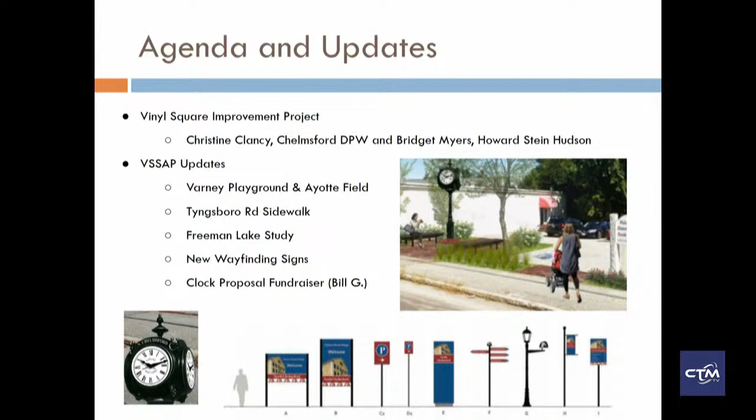There'll be a chance to potentially buy a brick and some other things. We have some people ramping up the efforts there, so there'll be more to come, but that'll be a nice enhancement. There'll be a temporary location, and then when the project's all well and done and finished, we're looking to potentially move it. I have another slide showing that, but it will be a temporary position right near the municipal parking lot.

Couple of things I just want to address here. This past year, there's been a few things that have gone on, and this committee does a fantastic job, and the team I announced earlier, whether it be the town support or the group here, it's just been very busy like anybody else. But I just want to share some opportunities to get people more involved.

At Varney Neighborhood Playground, if there's a potential phase two, if anybody wants to come up with ideas or just designate the open area to have more activities, this is a way to go over some bullets of other things to get more involved. We have the beach, the courts, Ayotte Field, there's some nice real estate in the park area. So if any parents out there want to create new events or programs, this committee is a good vehicle to get involved with to help drive that.

This past weekend we had a successful holiday tree lighting at Vinal Square in the Common. It went over really well, and I'll get into my thank yous. If you weren't there, you missed a good time, and Santa came and really kicked it off nice by lighting the tree. The North Town Hall Committee, I want to give a shout out to the folks there. They also do a great job with the Halloween parade and party. If anybody would like to get more involved with that too, we'd love to hear from you.

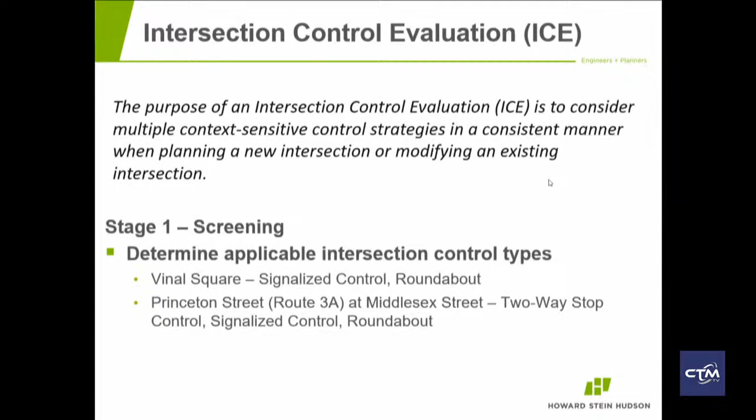I'm sure everyone is wondering, how can you fit a roundabout in there? Operationally, it seems like it would be a great idea because you have all these streets coming into this one area. So in theory, it actually would have been nice, but it doesn't fit. We have a very strange geometry. That's kind of the best thing we came up with as far as functional drawings. What you're seeing on the right side of the screen, it was like a peanut-shaped roundabout, but we were impacting buildings, so that kills it.

But we have to go through these functional sketches of different intersection types, and then they go through their forms. You get to this cost-benefit analysis of, is this the most appropriate type of intersection for this project?

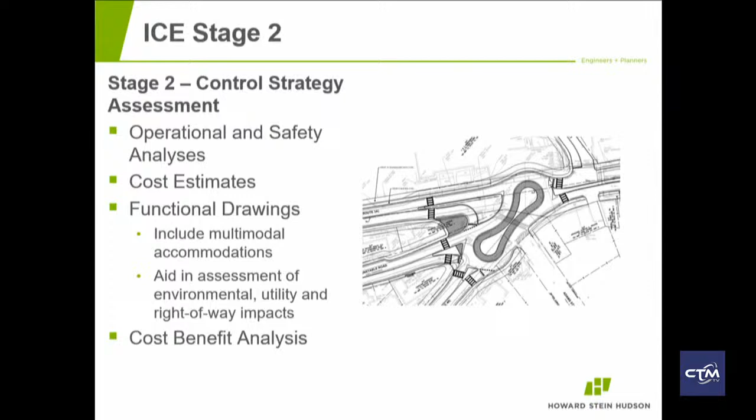The results of that for what we're calling Vinal Square, the bigger intersection with Groton Road, Dunstable, Adams, and 3A, is signalized as it is today. The Middlesex Street intersection is remaining a two-way stop control. That was a close one - signalized and two-way stop control were neck and neck, but it came down to cost. The safety improvements there didn't quite outweigh the cost of the signal, because the geometric improvements will provide some of that safety. Not to say that's not something that could be added down the line, but that's where we're at right now.

So there was a lot of back and forth reviews with MassDOT, because with any new policy the process is kind of a learning curve on both ends - growing pains and such. That took quite a while, wasn't expected in our design process, but we got through it and we're here.

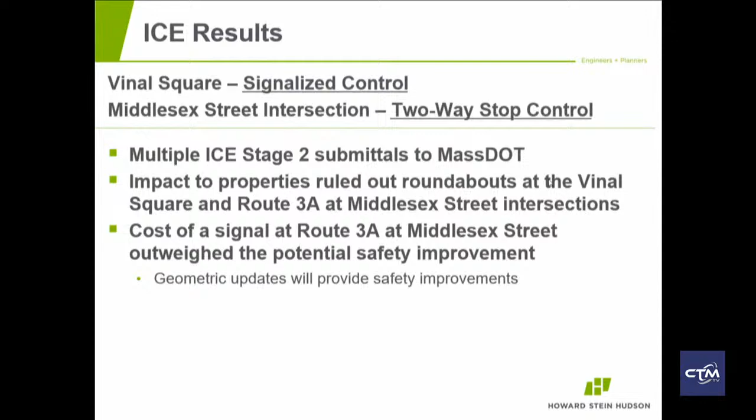So these are some of the crash data takeaways we saw. That larger Vinal Square intersection is actually listed on MassDOT's high crash data - in 2019 to 2021 it was a high crash cluster. Some of the main ones we saw were right-angle crashes, where you have that movement of people trying to take a left onto Groton and the southbound through traffic. That was a big one we saw.

So some potential ways to help with that are providing a protected left turn phase on 3A northbound when taking a left onto Groton, instead of the protected-permitted phase. So you end up with a green arrow protected instead of also dealing with southbound traffic. And then just some general intersection improvements, some tightening of turning movements and aligning lanes better.

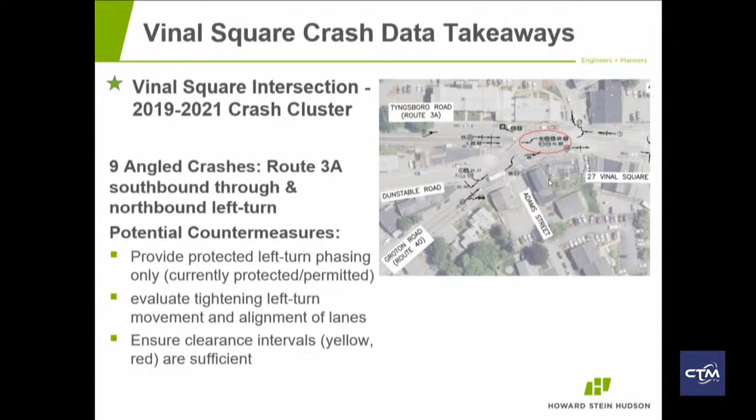At the Dunstable Road intersection, that came up a lot because it's very difficult to get out of Dunstable Road since it's stop controlled. Some of the feedback in that planning study was that people are blocking Groton Road westbound because people are trying to get out of Dunstable Road to get into the square. So we knew one of the main goals was to get Dunstable Road signalized so they would have their own phase and time to get in and out of that side street.

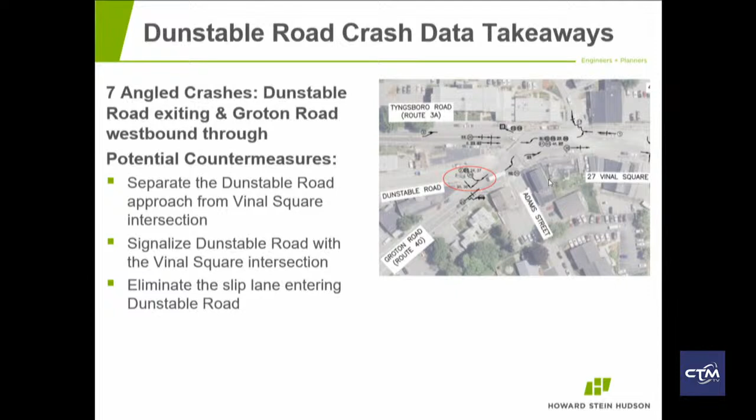Middlesex Street had a lot of rear-end crashes with that channelized right turn lane, because people take that right pretty quickly - you barely have to stop. Some of the feedback was that a lot of people don't stop. So the countermeasure there is to remove that slip lane and make it more of a formalized right turn lane, bringing it closer to a 90-degree angle with Route 3A. That also opens up that corner for more streetscape improvements, like the clock we saw in the earlier slides.

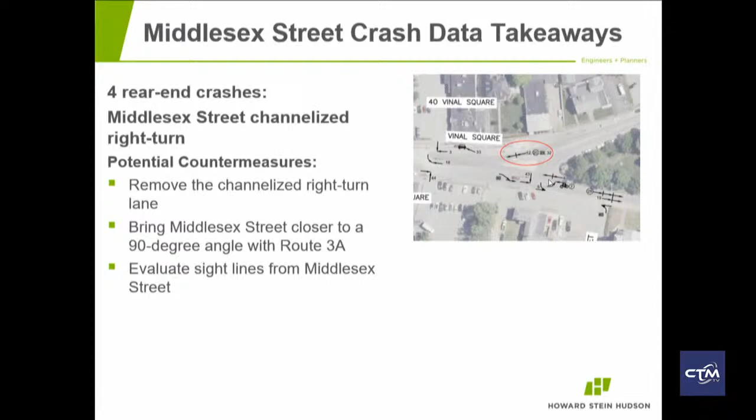Now I want to cover some of the things we have to consider when taking projects through MassDOT review. MassDOT will be funding the construction of this project, and Route 3A is a state road, so they will be reviewing it and we have to abide by their design guidelines and policies. One of those is the Healthy Transportation Policy, implemented in 2013. In simplest terms, it means we have to consider pedestrian and bicycle improvements on all their projects on all roads.

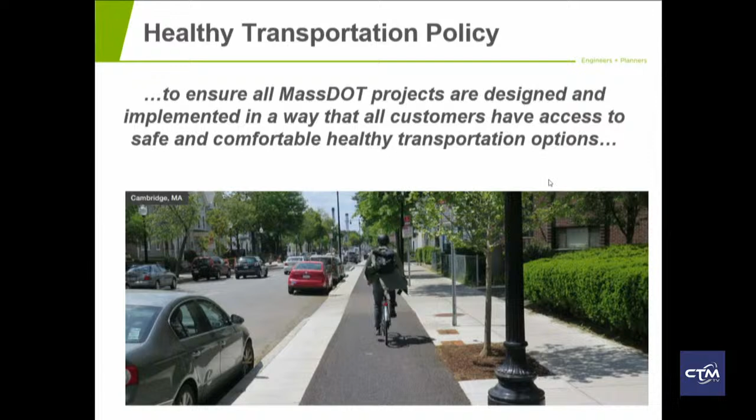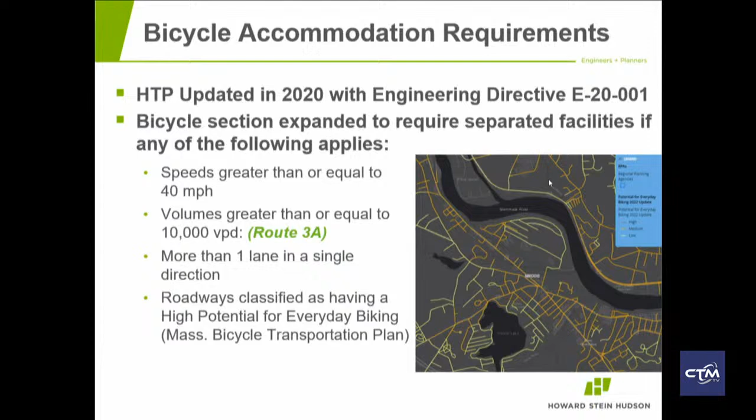In 2020, they provided an update to this policy with an engineering directive, mostly focused on bike accommodations and what type to provide based on speeds and volumes of roadways. The one we're ticking off here is on 3A, where we've got volumes greater than 10,000 vehicles per day. In those situations, they would look for a separated facility - more than just a painted bike lane on the road. They want vertical or horizontal separation, whether that's a buffered bike lane, a separated bike lane, or a shared use path.

The reason for that is pretty well stated with this graphic. The people they're trying to focus on with their policy are this 60% who are interested but concerned - somewhat interested, maybe in biking, but they don't because there's not a safe or comfortable place to do it. Not so much that 1%.

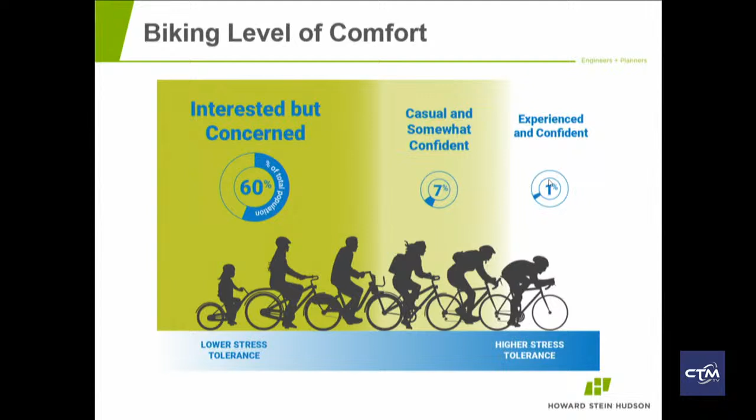Those are the people you're probably already seeing out there now, and there's probably not many of them. But those are the people already riding out on the road - they'll ride anywhere, anytime. What we're designing for more is the left side, trying to get more people who are potentially interested out on bikes.

So the general overall improvements included in this project are geometric improvements at intersections, new traffic signals at the Vinal Square and Dunstable Road intersections, ADA compliant sidewalks and ramps, safe bike accommodations, reconstructed pavement, new signage and striping, utility relocations as needed. There are some utility poles that will have to be shifted around, and some additional crosswalks.

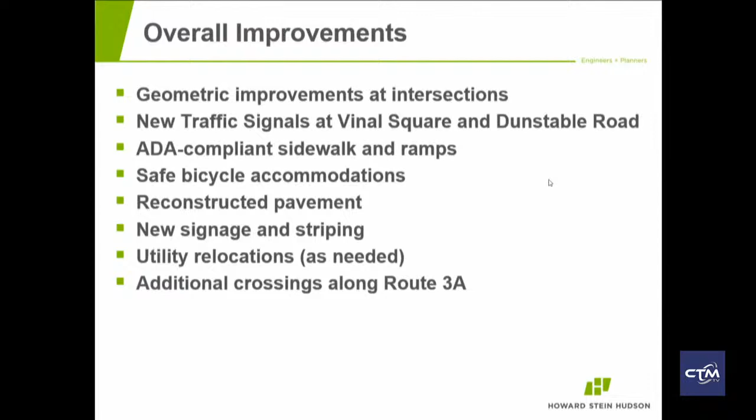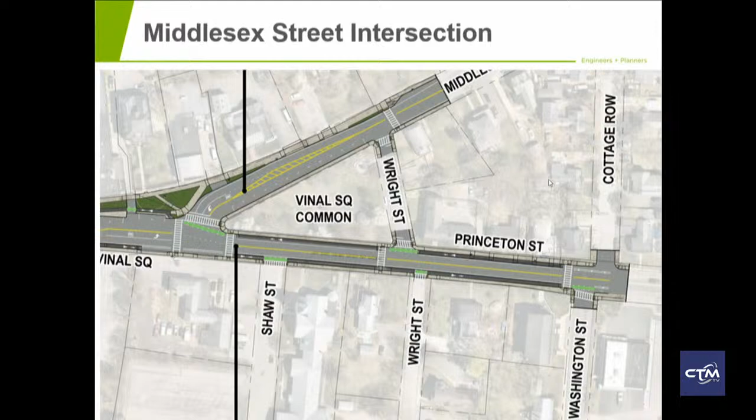At Middlesex Street, like I mentioned before, we're removing that slip lane. That lane coming down Middlesex Street towards 3A is primarily a right turn lane - that's the big movement. There aren't many vehicles making the left turn movement, at least from what we saw in the traffic counts. Removing it will slow vehicles taking that right turn, and add crossings, added ramps, reconstructed sidewalks, and bike and ped accommodations, opening up that corner for potential streetscape improvements and landscaping.

Now we'll go through a cross-section view. This is for Route 3A at Tyngsboro Road, north of the signal, looking south. On the right side would be the hardware store.

Going from left to right we have a 5-foot sidewalk, a 2-foot buffer, and a separated bike lane up at sidewalk level. So you have the sidewalk, then a buffer between the bike lane and sidewalk, and another buffer between the bike lane and the parking lane - you want that buffer so you don't have bikes getting hit by vehicles opening their doors. We've got one travel lane in each direction, and on the right side is an at-grade buffered bike lane, then a sidewalk which varies in width.

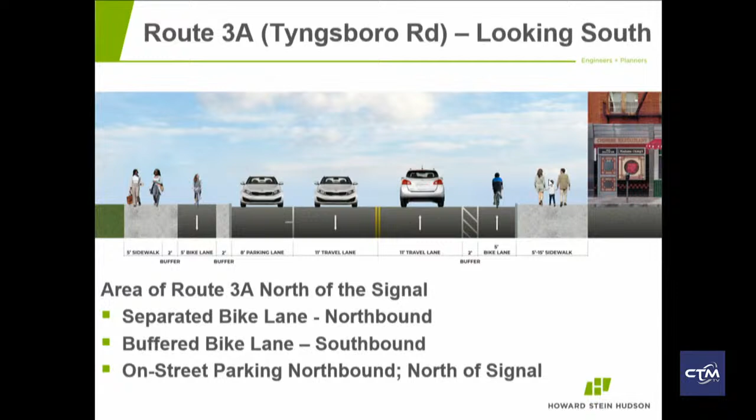Route 3A Vinal Square, this is the area between Groton Road and Middlesex. Here we have separated bike lanes on both sides of the road, as well as parking lanes and travel lanes, and a left turn lane in both directions. Northbound, it's the left turn lane onto Groton, and going southbound, it switches to the left turn lane onto Middlesex Street.

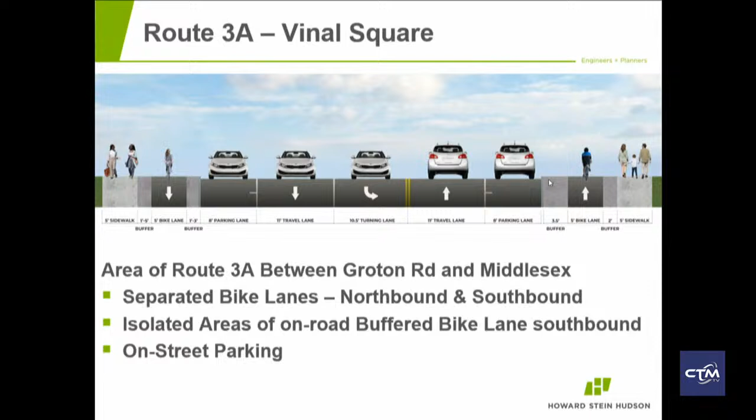There might be some areas where we ramp down the bike lane to be at road grade, a buffered bike lane. Sometimes when we're crossing a bunch of driveways, it's preferable not to have bikes going up and down driveway openings, so we'd bring them down to the roadway level in those areas.

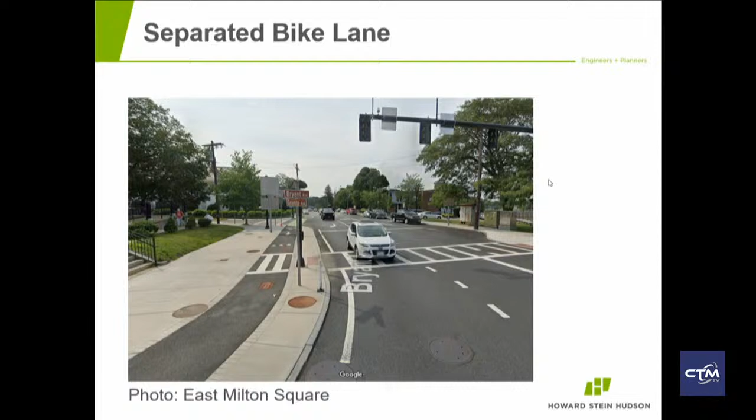So Route 3A Princeton Street, now we're south of Middlesex Street. This image is showing what's called a raised bike lane, where we don't have as much room, so we don't have the buffers, but we do want to get some of that vertical separation if possible.

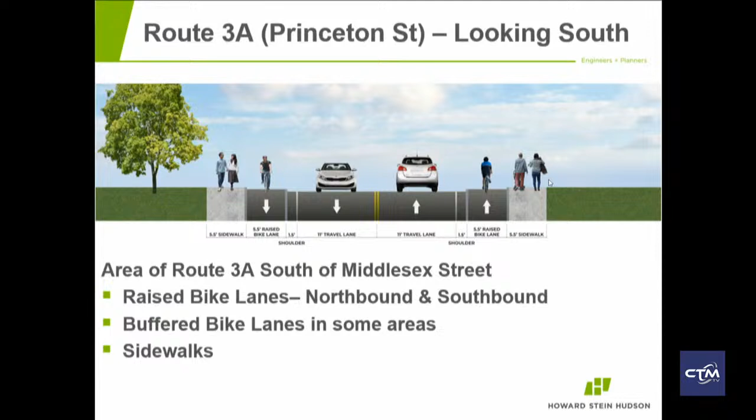Again, this might not be everywhere. We might have areas where we have to transition down to the buffered bike lanes, but sidewalks on both sides. If you go to the next slide, I have a better view of what a raised bike lane is.

It's kind of in between the sidewalk and the road. So you have the road, and then there's like a 4-inch reveal curb, your bike lane, and then there's a small 2-inch reveal, another step up towards the sidewalk just to get that vertical separation. This image is taken from the MassDOT separated bike lane planning and design guide. Next slide.

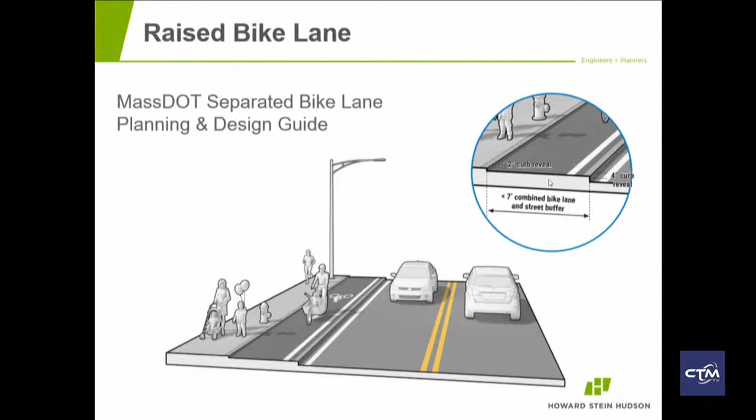On Groton Road, this is looking east towards the square. On the left side, there's a 5-foot sidewalk, and then there's the parking lane, travel lanes in each direction. On the right side, 2-foot shoulder, and then a shared use path.

The reason we did a shared use path here is because while Groton Road didn't have the volumes to necessitate separated facilities, you still have to provide some bike facilities. So in this case, the shared use path actually works out better because it's taking up less space than if you had to have 5-foot bike lanes on both sides, plus a 5-foot sidewalk.

You still have to have that sidewalk. So you're looking at 15 feet with 2 bike lanes and a sidewalk versus 10 feet, you can get them all in one space because a shared use path covers bikes and pedestrians in one area. So that is why this cross-section looks like it does, because this was a tighter one. You've got buildings on both sides, so space is more constrained.

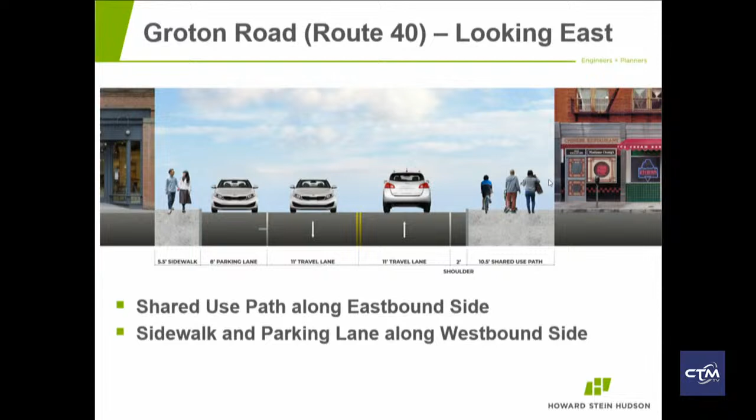Next slide. Dunstable Road, also pretty constrained as far as what we could fit there, because you've got the buildings on both sides. And then the parking on the right side, that's up against that property. I think the address is 1-13 Groton Road. It's a residential building, and from what we understand, their parking spaces are deeded to the building, because generally, even though we've tried to push back on this, MassDOT generally does not take parking as a justification for not providing bike facilities.

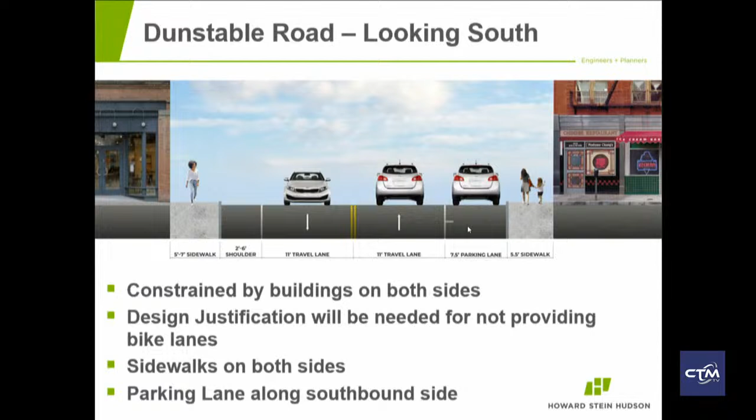That's a battle we've tried to fight before. But in this case, because those spaces are deeded, we were able to maintain that parking lane on that side. But we wouldn't even be able to fit bike accommodations here just because of the constrained space with the buildings on both sides. You wouldn't even have been able to fit them there. So we have sidewalks on both sides of the road, a varying shoulder on the left side, and parking on the right side. Next slide.

Middlesex Street, similar to what I was saying with Groton Road, as far as the 2-for-1 you get with a shared use path. That's why we have the shared use path on the left side there. On the right side is the common, so we have the parking lane along that side of the road with the sidewalk, and then the travel lanes and the turn lane.

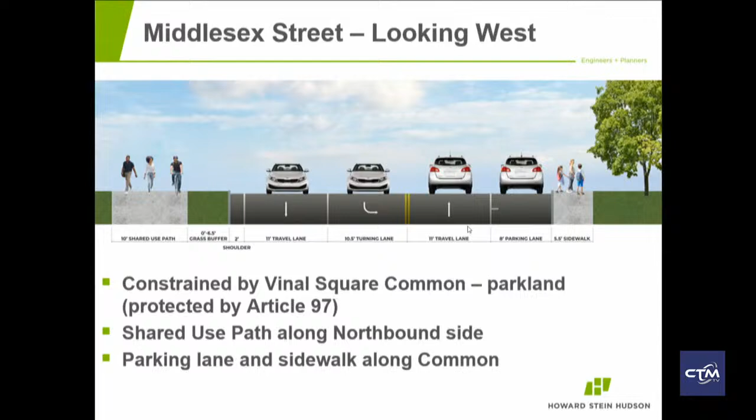In terms of parking, because we have constrained roadways where we're trying to fit everything in one area, there is an overall loss in parking with the overall design. One reason is trying to fit everything within a cross section. Another is that the parking currently within the intersection isn't supposed to be there even today - it's not technically legal to have parking spaces within a signalized intersection. So we do lose some spaces between Wright and the stop line on Route 3A, right in the intersection, because they're within the signalized intersection.

So we're trying to look at other ways to get some parking back. One thing we discussed, including with Christine, is converting Wright Street to a one-way and adding a parking lane along the side. From the traffic counts, we think it makes most sense as one-way northbound, but we'd like feedback from people on that. We'll continue looking to see if there's any other way to squeeze more parking in. We can also talk with the town about any off-site or off-street parking they've looked into. That's just something we wanted to bring up now, and why we were considering Wright Street as a one-way.

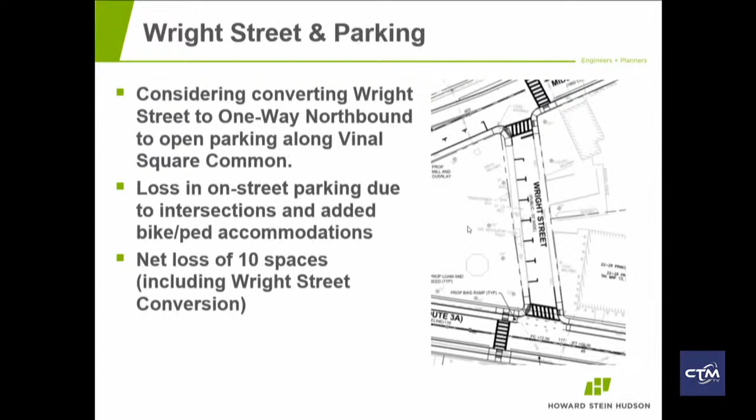So the next steps in our schedule - we're working on our 25% design, which is a full package that goes to MassDOT with plans, estimates, and other reports. They review it, provide comments, then usually there's a utility site walk and comment resolution meeting, and then we'd be back for the official 25% design public hearing. That would be a big public meeting led by MassDOT, held here in town, tentatively potentially happening in the summer.

And then we continue on with the design process - there's 75% design, 100%, and what's called PS&E, which is just plans, specs, and estimate, the final submittal. So there's a lot of back and forth with comments. We're still at very early stages, so there's still a lot of time for comments and discussion. Right now it's on the draft transportation improvement program for 2028 for construction funding. And I think that was the last slide.

So 2028, meaning that's the start... Unless that can change - if other projects fall off the transportation improvement program through NMCOG and there's space, it can move up if it's ready. That's always a potential.

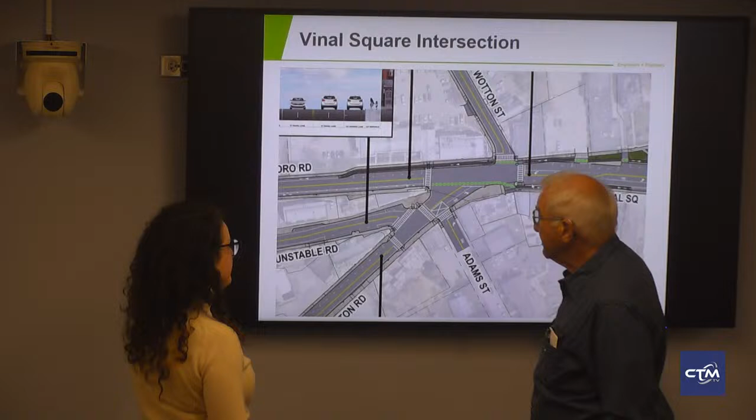And it would be public parking, I assume? I noticed those were deeded, so rather than individual parking, will it be public parking for the businesses or what have you? If those are deeded to the property like we saw, then they may still be able to be marked. That's something I think Christine was trying to talk to town council about.

I found the deed and it did have a blurb in there about the parking. I don't know how that works on a public road, but we are reviewing this with town council, Bridget.

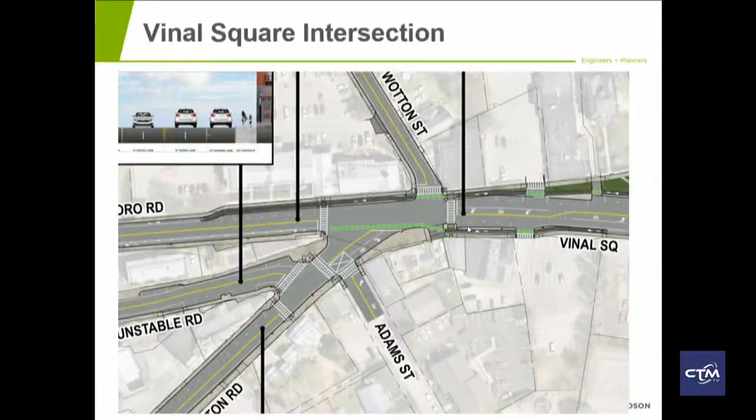So the way that intersection works is people going to the right just kind of breeze through, and the people taking a left to go onto Groton Road form almost two lanes, the people that go right, and the people that want to take a left onto Groton Road are the ones that get stuck.

Waiting for the other oncoming traffic. So I don't understand how they're gonna work this. The people that want to go left onto Groton Road and the people that want to go right down 3A are gonna be stuck behind each other. That's almost gonna cause twice as much traffic.

There's a left turn lane. It's the same setup. But is it the left-hand lane to go back around that common area? Like the left that nobody should take? That left lane is there now, the one that nobody should use if they know what they're doing?

No, I'm talking about the approach before Adams. That left lane is there now, that will continue on to go up to Groton. If they have to go down Dunstable, they'll go from there, but that's the left I thought you were talking about. No, coming down to Middlesex before you get into that light.

It's gonna get all backed up. So right now this kind of forms two lanes. These people veer off and go straight to the intersection, and the ones that want to go left on Groton Road kind of get stuck and wait for these people, and scissor their way through.

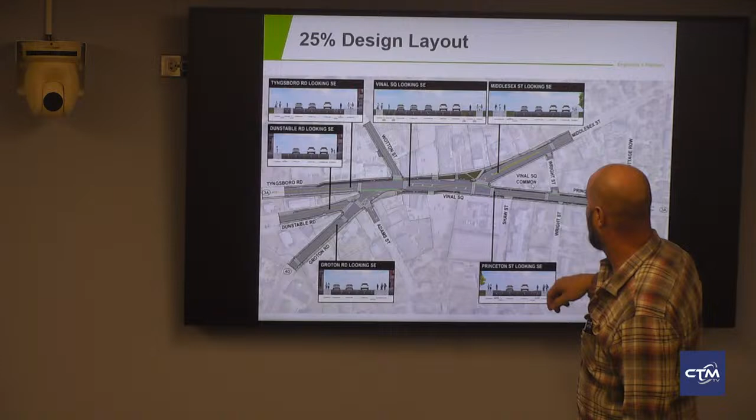That's the issue, because of the dangerous nature of the intersection. That's the nature of that. They'll have to slow down. Well, it's not so much slow down, the traffic's gonna be backed up to the train tracks.

But now that intersection right there is signalized too, right there. Is that correct, Bridget? Is that not gonna be signalized? That's not signalized, it's gonna be knocked out. That was in the plan, Mike. So now those people are gonna get double stuck, so they stop and then they can take a right to go.

Right, so that's a good point though. How was that discussed in the meetings, deciding to get rid of that light and to manage that? Do you want to talk about that? Yeah, sure. Bridget touched on it a little bit earlier, but basically that intersection came down to a cost versus safety question, and which one weighed heavier for the intersection.

So because there isn't a specific safety concern at the intersection today, the cost of a signal outweighed the safety improvements that it would provide. So it's something that can still definitely be evaluated in the future, but at this point, MassDOT doesn't see the benefit of having a signal at this location.

Is there any review of that or appeal of that prior to the continuing of the design that the town can look at, or no? Oh, I'm sorry, we can ask. We haven't appealed one of these ICE decisions before. Yeah, that was all part of the ICE process that we went through.

Where we evaluated for this intersection a roundabout, a signal, and then the two-way stop control. And the two-way stop control came out as the preferable option. So, but yeah, we've never appealed one before. I'm not positive how that process would work, but I just didn't know if there was another chance to review it, or the design's continuing on without that now. As of now, yes.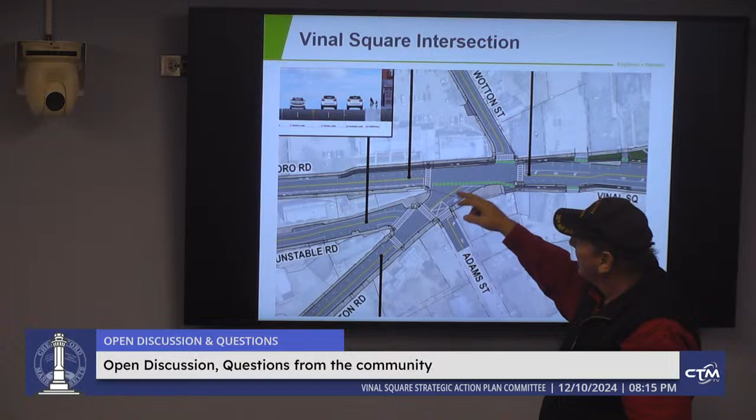Right now they just go whoom, whoom, which is getting the people out. Can you just go to the other side, the other intersection? And this is the biggest problem I see right here, that thing.

If anybody ever stood there, and I ride my bike too, by the way, I love my bike. I don't ride it in the winter, and I usually plan my routes, I know. And all this traffic's going all the way down here. That's gonna really stop it.

I'm just giving you a heads up, I don't care what engineer said what, I know what's gonna happen here. If there's no light here, nobody's gonna let them out. They're just gonna keep coming and coming and coming. And they're gonna stop and be all backed up, and this light's gonna turn green and nobody's going anywhere, because they can't. Has anybody stood out there from 4 to 6 o'clock?

I'm just curious, I have. You know what I'm talking about, right? And you gotta get them in, you gotta get them out.

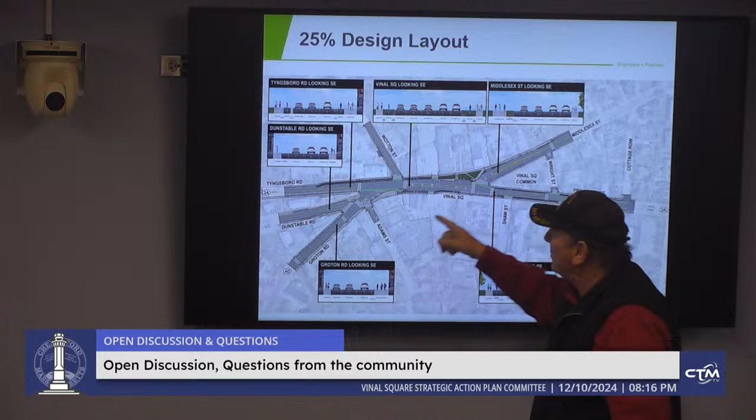It's too bad we couldn't have just one lane. I know the clock's going there, I get it. I think the clock would be better here, or right here at the hardware store, right in front there. But probably not the hardware store, because we don't want too much attention to the hardware store. But maybe, that's right, I said it.

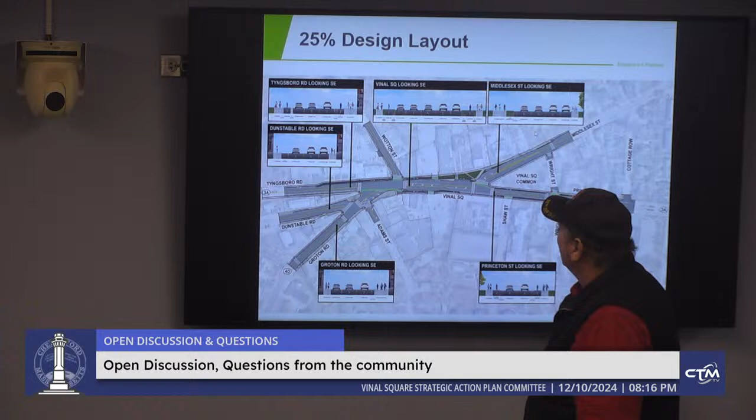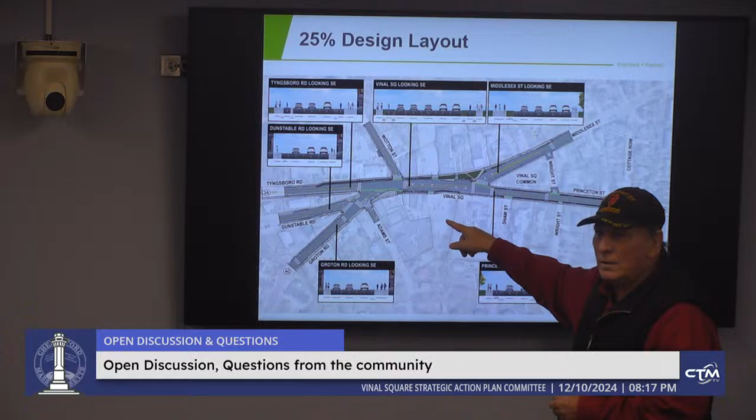Up here, I love Louise, don't get me wrong. But it's too bad we couldn't have just one lane, just to get the flow out, to not block this so much. And as far as the parking over here, this is all Rosie's parking in here. Does anybody know who owns that? It's not us. Eventually, and I've already got word, so eventually that's gonna be sold. Where's everybody gonna park? We need to think about that.

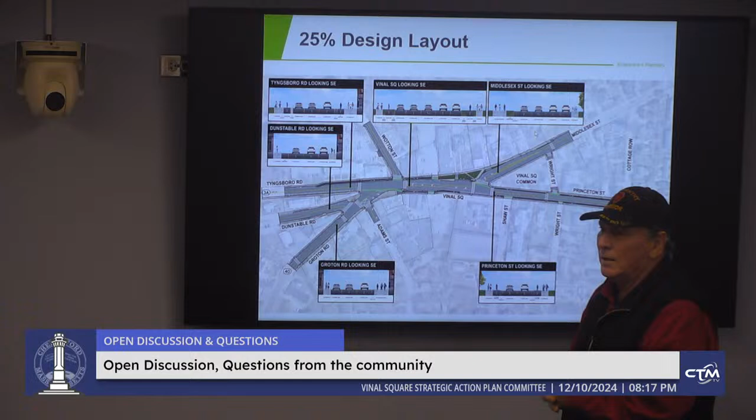A lot of this plan is good, I get it. Some of it isn't so good. We gotta make that go faster. Somebody's gotta invest in some parking. I know it's gonna cost this town a lot of money, and we need to clean up the lake. But we own the parking on the other side of the street, you know, yeah.

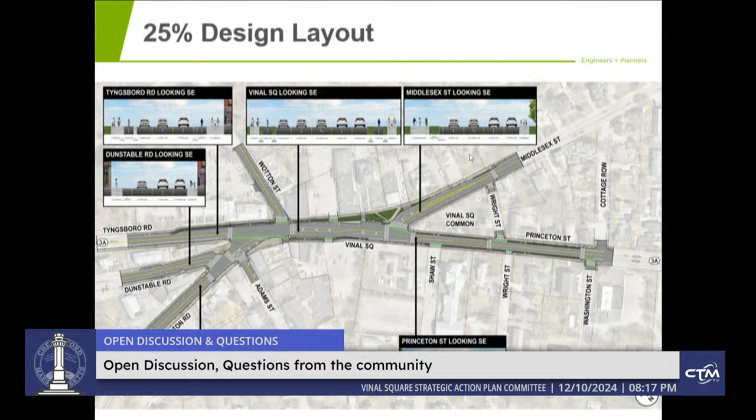While we have this map up, can we talk more about making Adams a two-way? Because to the parking, I don't understand how that could be feasible, but talk to us more about the thought process of turning Adams into a two-way. Do you want to, if you could.

Yeah, sure. So Adams Street is proposed to be right in, right out, and the idea is that it would eliminate people taking the left into Adams, potentially creating the safety concern of having the lefts taking that turn in, having people back up behind those left turning vehicles, and instead they would go down to Newfield. They would turn in there, and then because Adams Street is a two-way, you'd be able to go up that way as needed instead of taking the left into Adams now. So that's kind of how it would operate functionally.

As far as parking, I believe you would have to be limited within a certain amount of feet to the intersection, but I think it could operate two-way, having just the narrower width, as you see a lot of streets in Boston, how they have parking on both sides, and you would just take turns who goes. So at the specific Adams Street intersection, I think we would limit parking, but farther down, we would still be able to have them.

Bridget, if you feel differently, I don't know how much we've explored that. Yeah, no, I generally agree with that. I mean, it was really driven by trying to get rid of that left turn into Adams Street. With Dunstable being brought into the intersection, you have this big area with, we're very worried about having a car sitting there waiting, trying to take a left in and blocking out.

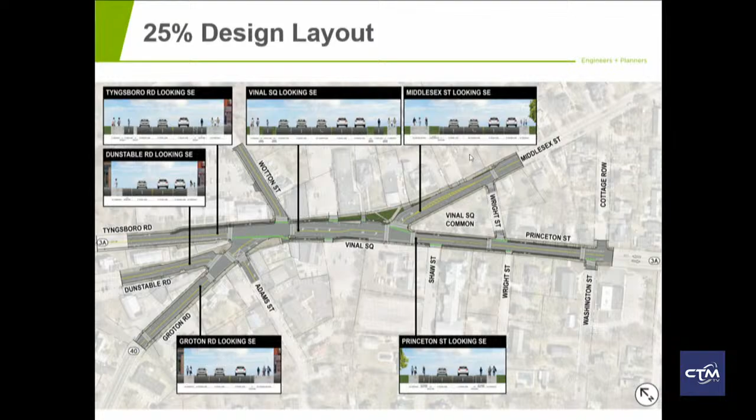Have you looked at preserving the parking for the people who live in that building, as was pointed out? And just precluding a left turn onto Adams Street? I think the point that was made about you're taking away parking from people who actually live right there is a big concern. Right. Yeah, we can look into that. We did. No, I don't know how they're gonna get.

Well, I don't- even with right in, right out, or no left turn on Adams, you have this issue now: how do the people who live there get to their parking spots? Because right now, if they're turning left to get there, and you take that left turn away, then whether you just take it away and leave the parking there, or whether you make it right in, right out, the only way they can get to parking for their home is to somehow get back up north and come down and turn right.

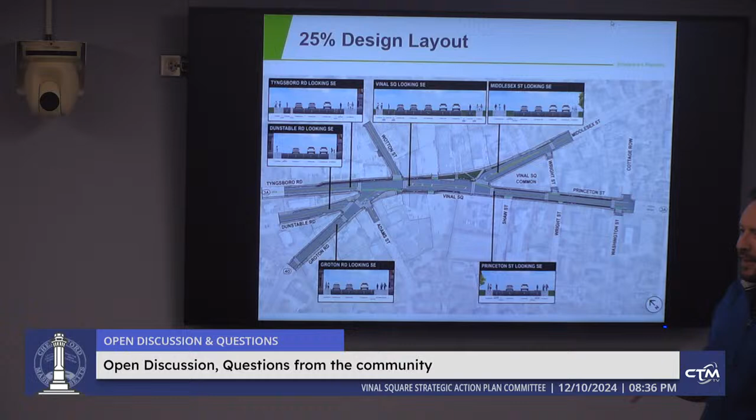Sorry, one super quick question. You know, bikers, Dunstable and Adams are problematic intersections, right? I'm not suggesting we cut off those streets or convert that into a parking lot, but do we need these connections? I don't know, I'm just throwing that out there.

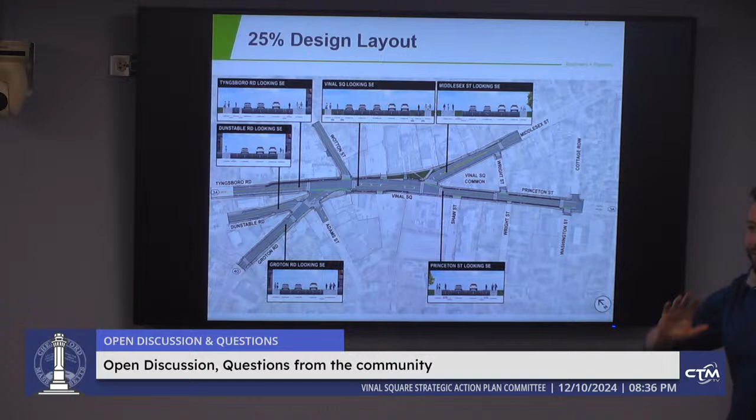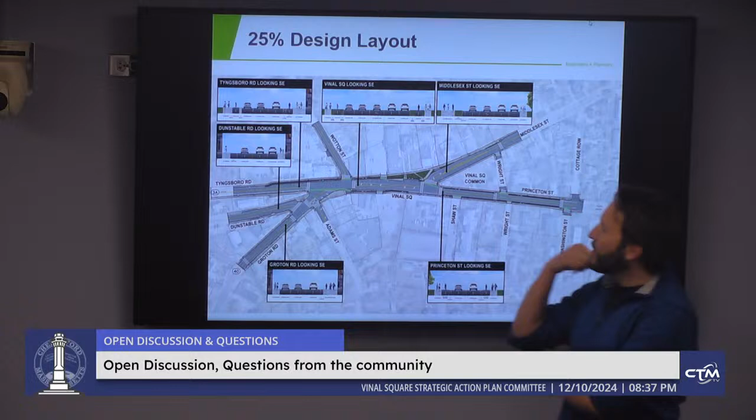Somebody mentioned, just like Steve had said at one of the other meetings over the last couple of years, about making Adams a dead end up to the intersection. Now I'm not here to say that's what we're doing, I'm just saying it would try to slow things down and make sure it wasn't a pass-through or cut-through, where people could still get up there for the doctor's office or the houses, but wouldn't then venture into the square, which would maybe be safer for those people on that section of Adams Street.

I don't know if anything like that has been discussed on your end, but it was one of these public input sessions that somebody else talked about. Anything to not take away any more parking, but to keep it safe and make sure things, once all is said and done, it's a nice way to navigate and even get more people on foot.

I think it would be more inclined to see people walking around the square into the other areas, the green space, into businesses, to be able to cross, and then we'll see bikers when all this is said and done. I think we're going to see more people on foot. But anyway, that's what I'd like to see.